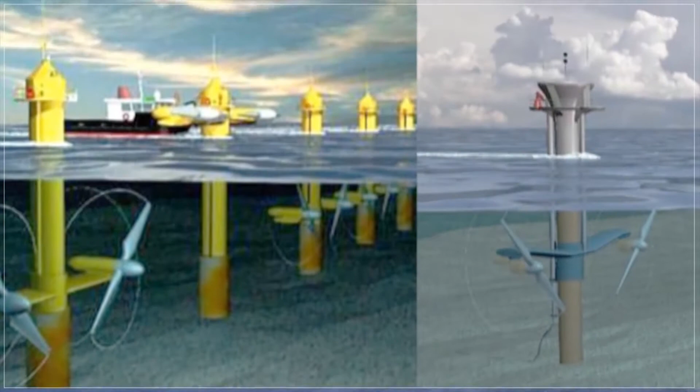Although research to harness this clean wave energy has been actively carried out in various countries around the world, they have not been able to find commercial technologies because they cannot solve the special problems of the ocean.

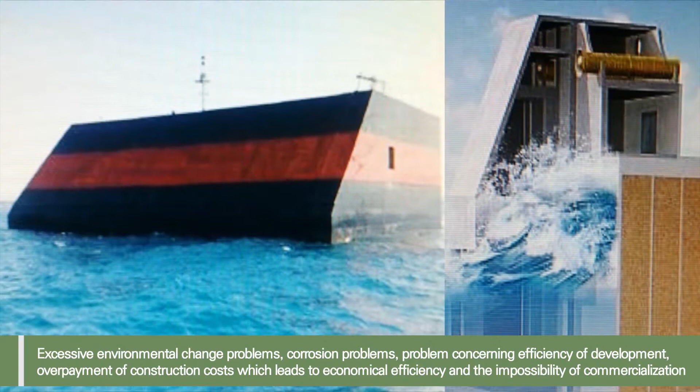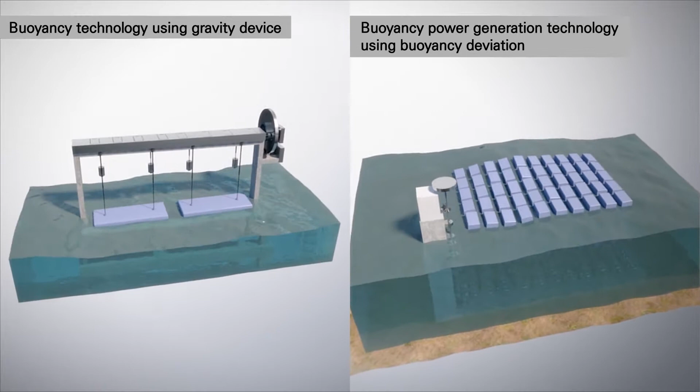Some of the representative causes are problems of device structure destruction due to waves, as well as collisions with floating matter above and under the water, breeding problems of underwater fishes and shellfishes, wave energy control problem, excessive environmental change problems, corrosion problems, problems concerning efficiency of development, and overpayment of construction costs, which affect economical efficiency and the impossibility of commercialization.

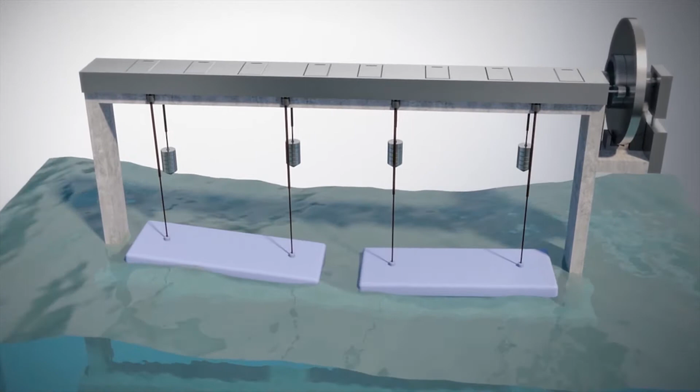The present invention is a technology for solving these problems by refining only the potential energy of a wave fluid while coping with the motion of waves in a free state. The basic principle is to install a gravity device that converts the kinetic energy of the buoyancy device moving by waves into gravitational potential energy, where the interaction of the gravity device and the buoyancy device is converted to the rotational energy of the power generation shaft by using the rope.

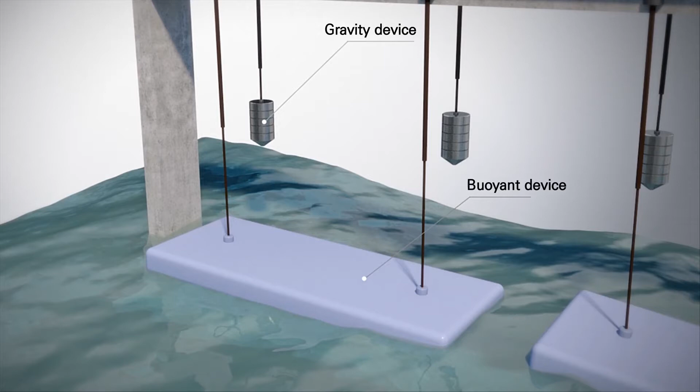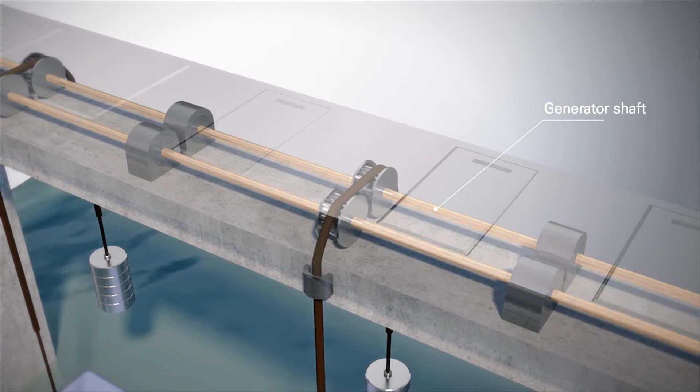The structure of this technique consists of a buoyant device for buoyancy, a gravity device which corresponds to the buoyancy device, a rope connecting the interaction of the buoyancy device and the gravity device, a generator shaft for converting the linear motion of the rope into a rotary motion, 2 power generating shafts, and 2 unidirectional power generators, inertia rotors that maintain the uniformity of power generation, generators that are driven by rotational motion, and a civil engineering structure supporting these power generation devices.

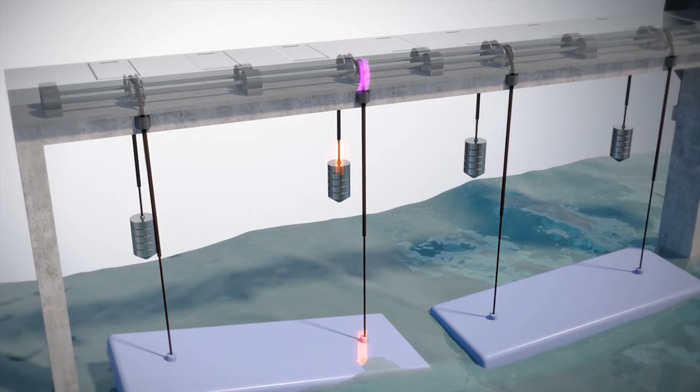The buoyancy device moves up and down by the wave, and the gravity device converts the up and down kinetic energy of the buoyancy device into the rotation motion and is connected to the rope to transmit power, which is only absorbed from the movement of the fluid. Due to the characteristics of the rope, free movement of the buoyant body in the movement of the wave is assured, and the destructive force of the wave is lessened, which leads to the safety of the structure.

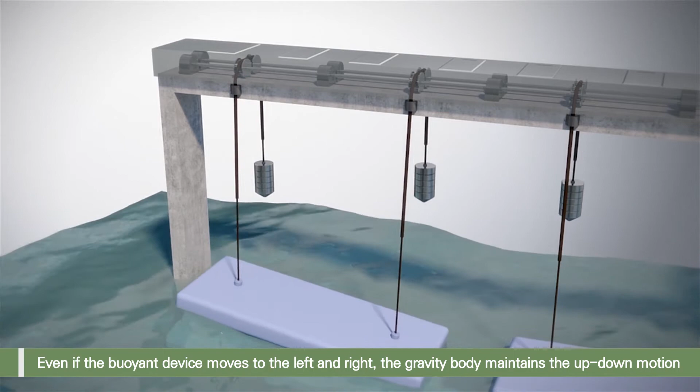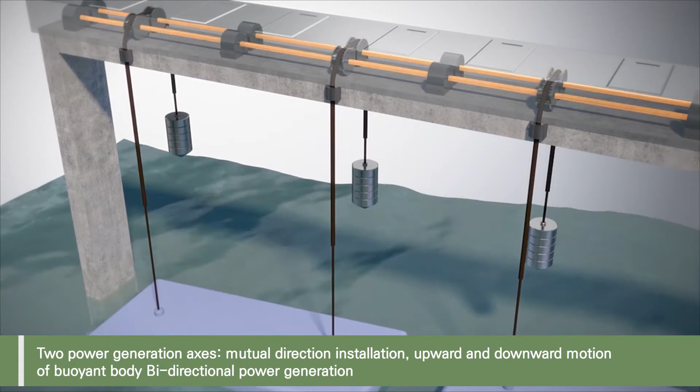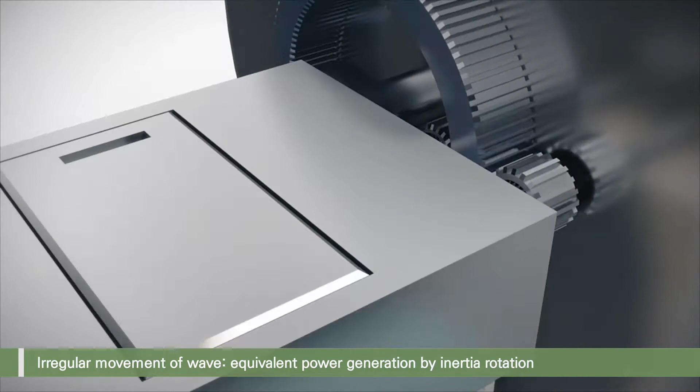In addition, 2 power generation shafts can generate in both directions of upward and downward movement of the buoyant body, and even with the irregular movement of waves, uniform generation can be achieved through inertia rotation. By installing buoyant bodies on the entire surface of the water, it is possible to maximize the efficiency of the power generation.

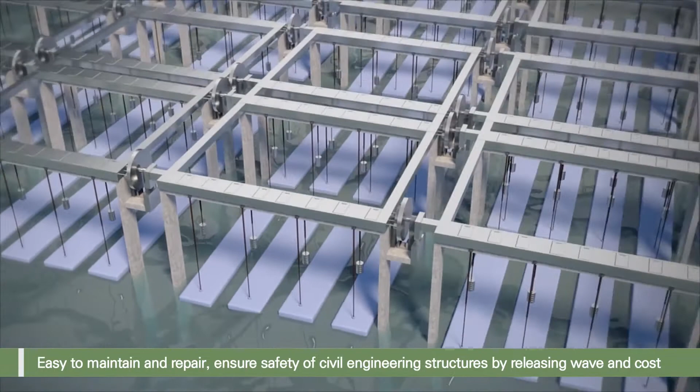These power generators have no equipment installed in the water and are connected only by rope, which can solve problems such as shock from underwater floating matter, power generation disturbance from fishes and shellfishes, destruction of equipment from wave power, and more. Also, all of the devices are constructed on the surface of the water for easy maintenance and administration. In addition, since the device lessens wave power, it is possible to secure the safety of the civil engineering structure, which minimizes the civil structure costs.

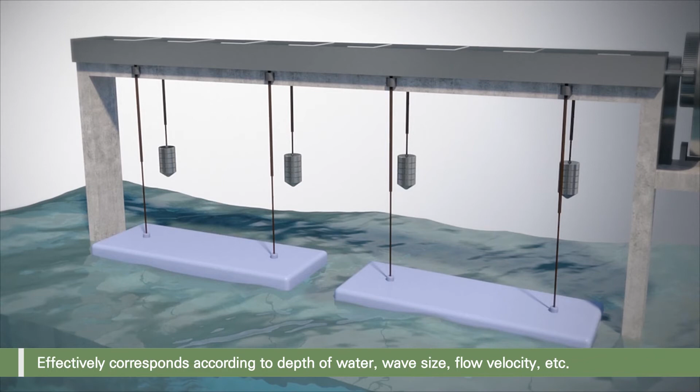The buoyancy device of this generation method may correspond with the gravity device in a 1-to-1 or 1-to-many power generation method, depending on the efficiency according to the marine environment, such as depth of the water, the size of the wave, the influence of the flow velocity, etc.

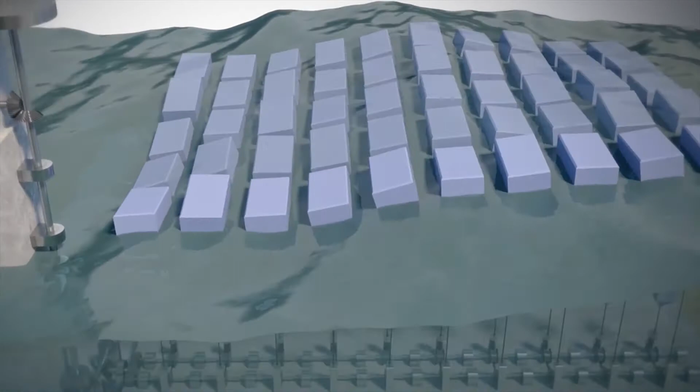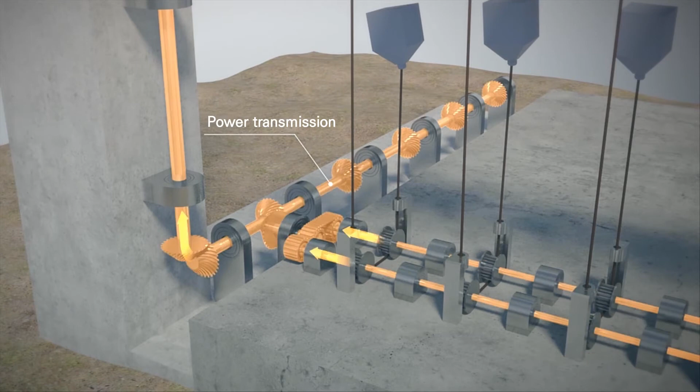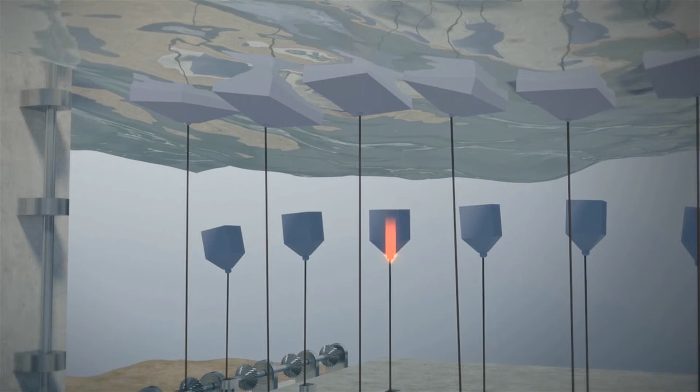The second generation technology using buoyancy deviation is a technique suitable for deep waters. By using 2 buoyancy elements, which are connected by the rope, buoyancy deviation is generated through the power transmission device. The buoyancy body on the water surface moves up and down according to the height of the wave, and the buoyancy body in the water moves up and down steadily by the interaction due to the buoyancy fluctuation with the buoyancy body above the water surface, which allows control of the power generation amount by the buoyancy from the underwater device.

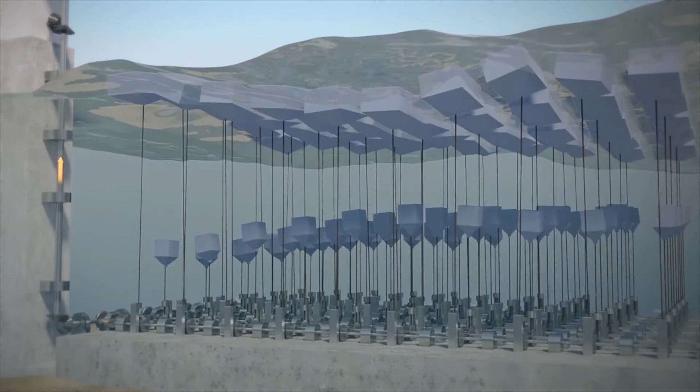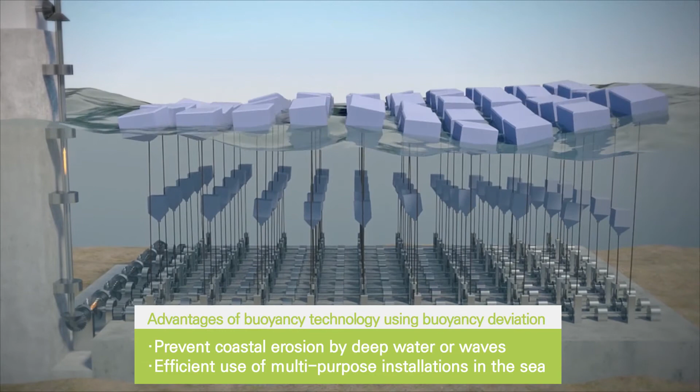In addition, the 2 buoyant bodies ensure the free movement of the waves, and stability is secured by the upward and downward movements due to the mutual buoyancy action. There is a disadvantage that underwater installation brings corrosion problems and reduces the efficiency of management. However, it is an effective method of generating power for the purpose of breaking waves, to prevent coastal erosion due to deep water or waves, or to utilize multiple facilities at sea.

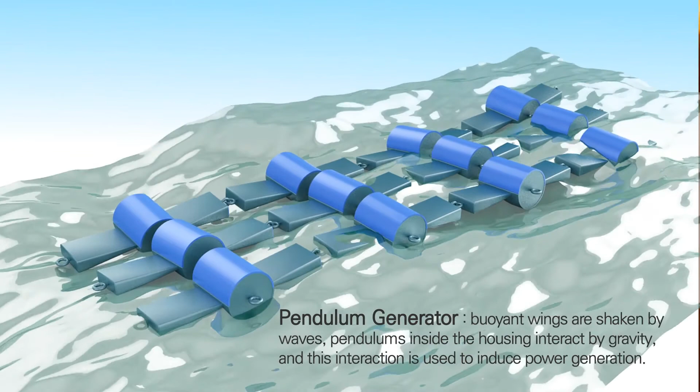Along with wind power and solar energy, such wave power generation is a semi-permanent, environmentally friendly energy source that can be generated continuously and for a long period of time, all throughout the year, unlike wind power and solar power, which have time limits. Wave power generation can be commercialized with deep interest and concentrated support at the national level, and it can be selected as a new business creation strategy of the shipbuilding industry.